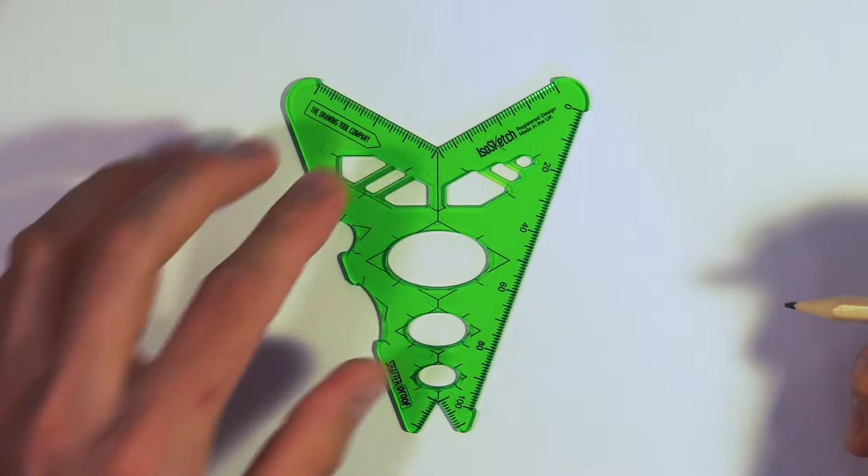Hello there designers! Today we're going to learn how to draw the chassis for our Jaguar Primary School Challenge race car. We're going to start off using the measurements on the screen and drawing the back part of our chassis using the IsoSketch 3D drawing tool.

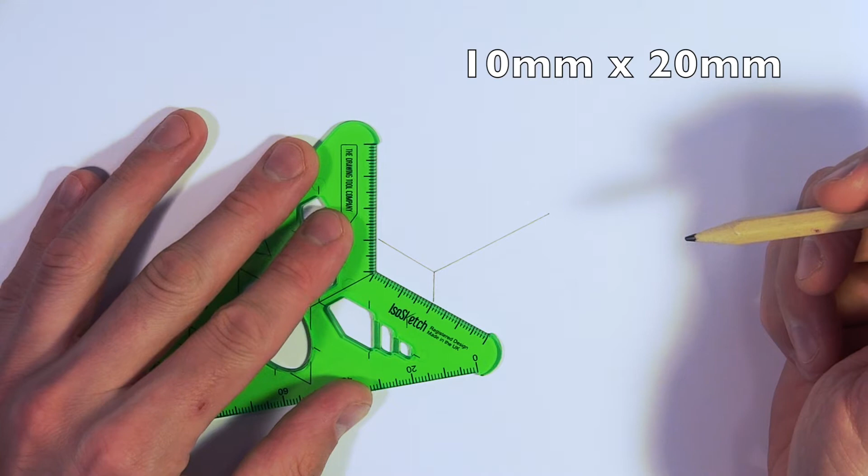You can see here that we're using small measurements: 40mm which is 4cm, 20mm which is 2cm, and 10mm which is 1cm. Here you can see we're just starting to draw a 3D shape with the drawing tool using those measurements on the screen. This part of the chassis looks a little bit like an eraser, so think about what you rub out pencil with if you make a mistake. Hopefully we're not going to make a mistake though today, are we?

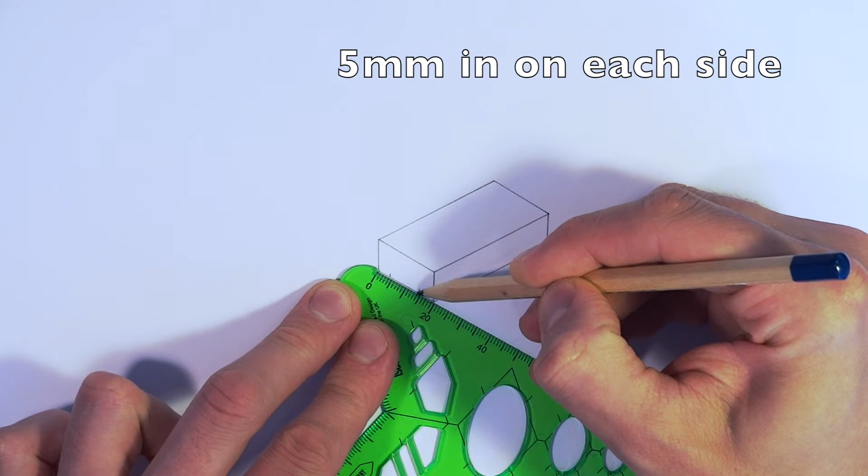So we're just going to join this line up, and you can see on the screen it's 10mm down, 40mm across. What we're going to now do is mark 5mm in from each side on this bottom line here, using the ruler edge, marking 5mm in on both these lines, so the top and the bottom of this end of our chassis block at the moment.

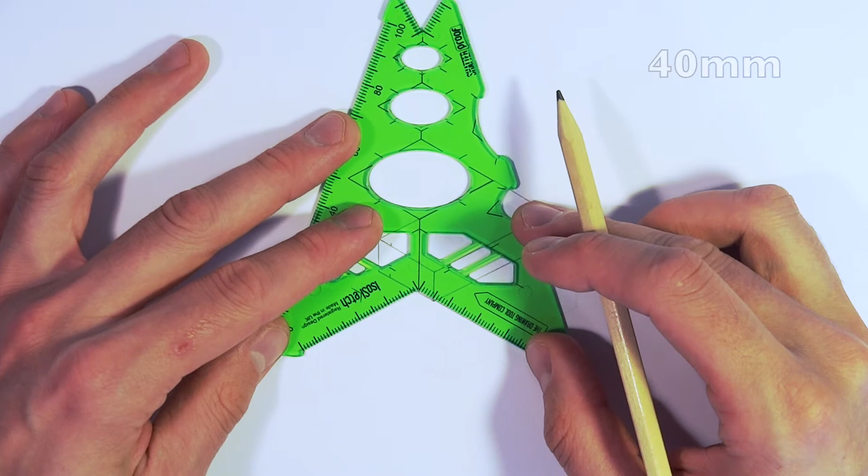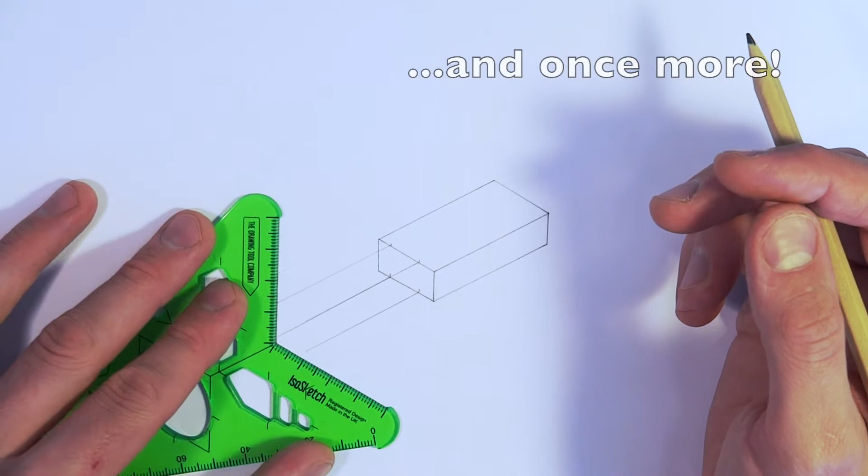Now this is actually the rear of the chassis, so we're now going to draw the front part of the chassis by extending a line 40mm or 4cm straight forward from these points. You see how we're using the IsoSketch tool just to make sure the line is exactly in keeping with the shape, making sure the green edge of our IsoSketch tool sits along the edge on our drawing already. And you can see how those lines look perfectly parallel, and that's the key word here, is that they're parallel with the rest of the drawing.

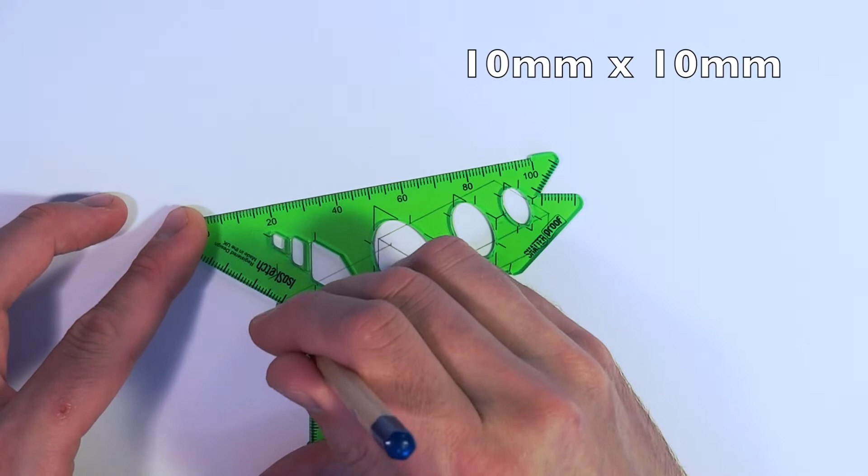So all we're doing now is just finishing this end off, and it's 10mm by 10mm just to finish off the nose cone of our car. How easy was that? Right, we're just going to finish off this little line here so that we've got all the lines that we need in place for the chassis.

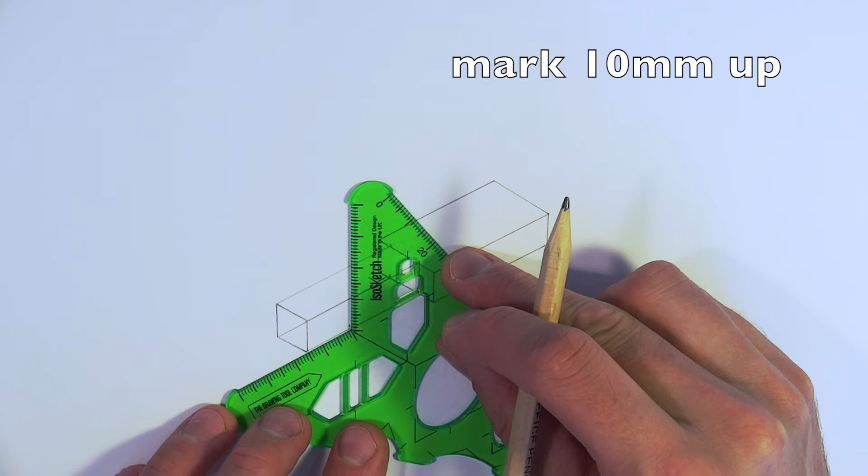And we're going to move on to now marking out where our axles will go. The first thing to do is just line the ruler up so that 0 is right at the start of the shape, and just measure in to where 15mm comes and make a little dot. So 15mm in, and then we're going to use the ruler again, lining up the tool so it's parallel with our drawing, and marking a line 10mm across, and now 10mm up.

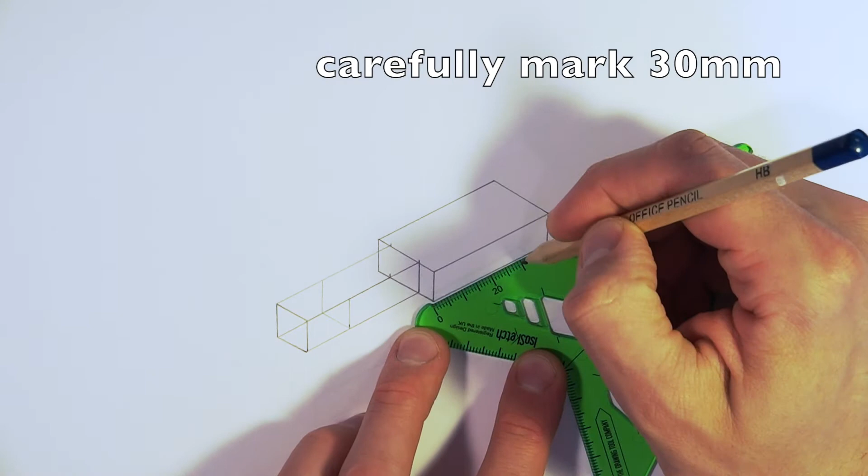So we're marking, think about this being like cutting the shape across, like a slice of cake or a slice of butter, and we're marking across it. Now we're going to do the same at the back, but marking 30mm up from one end, making a mark, and then drawing a line that's 10mm or 1cm up.

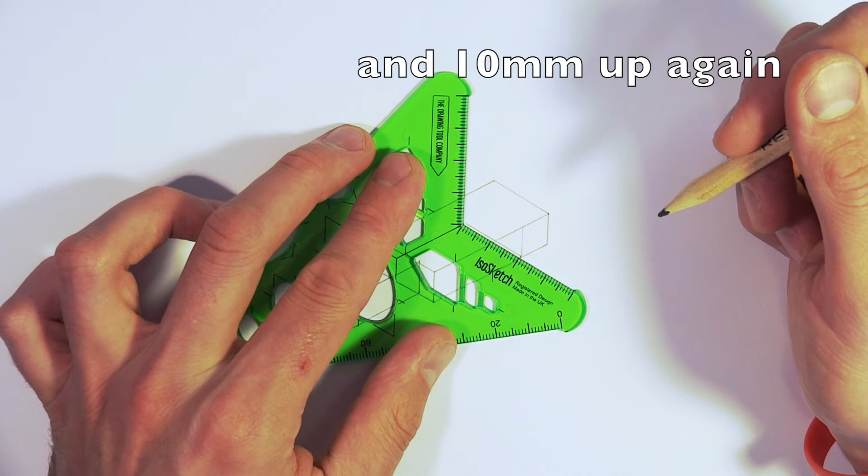Again, move the tool so it's parallel with the shape, and then mark across 20mm. It's important to count these measurements on the ruler as well, don't just guess them. Then finish this off by going 10mm up, and you can see again we've drawn like a slice through our chassis.

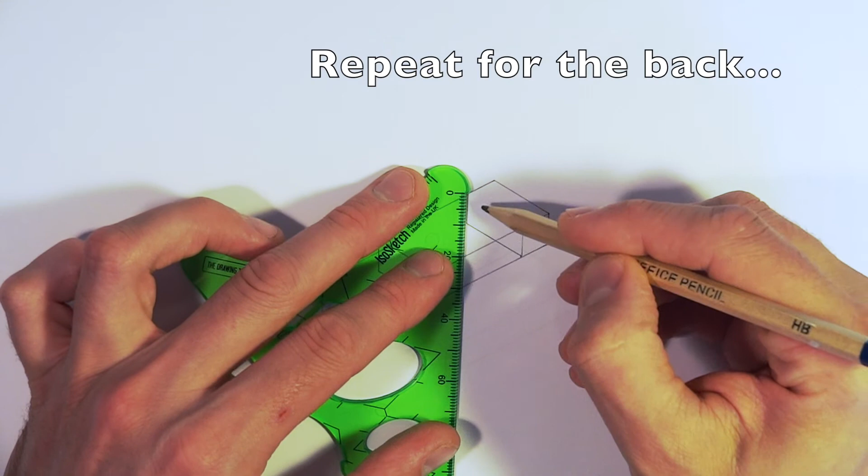Okay, find the middle of this line here, so that's going to be a 5mm dot, and find the middle of the second line. Repeat this at the back, and this is where our axle holes are going to go through our chassis. So we're just finding the middle of all those 4 lines. Now, time to draw our axles on.

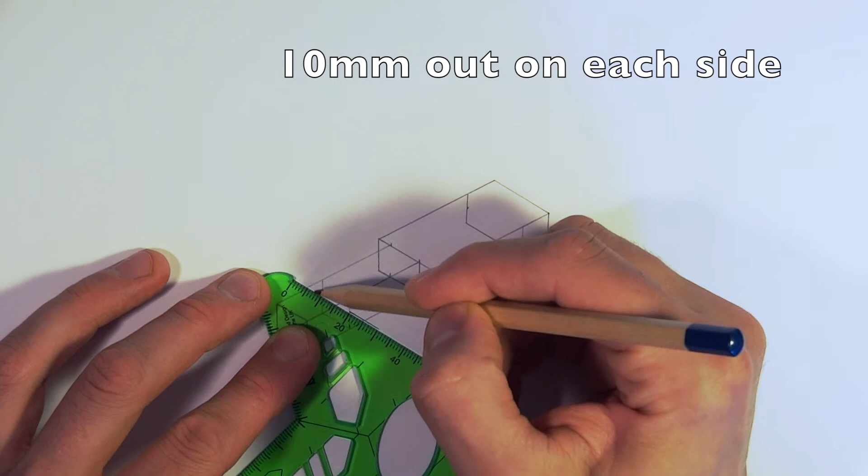Position the ruler so that you've got one of the centimetre or the bigger markings next to your dots, and we're going to mark 10mm out from each side of the chassis. So using the ruler, marking 10mm out, and that will look a little bit like that.

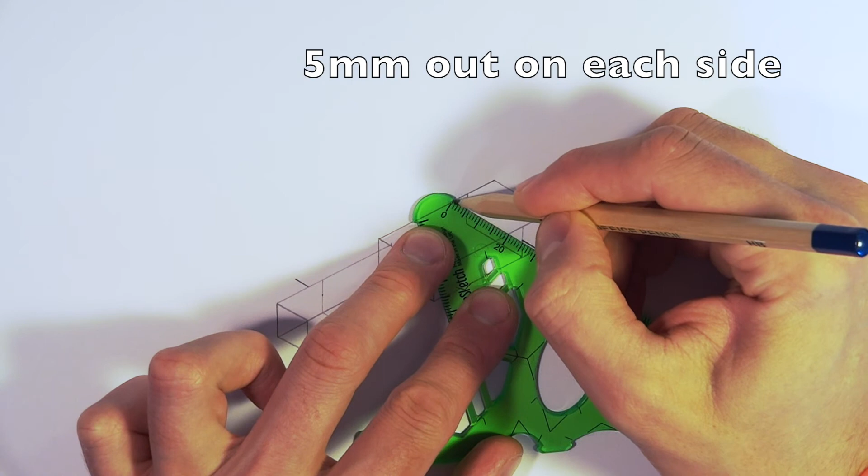Now on the back it's going to be a bit different. Our axles are the same length, but because the body is wider, our axles only need to stick out 5mm on each side. So we're just going to carefully mark on 5mm. See here, it barely even shows over the top of the chassis.

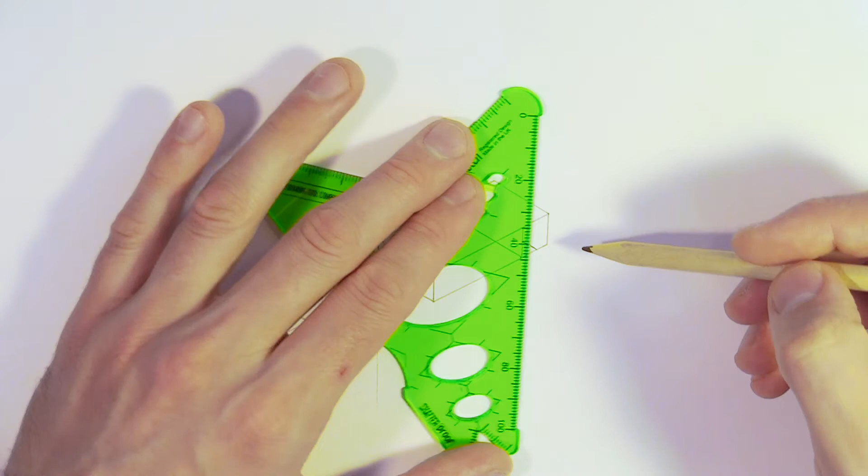Now all that's left to do is mark on where our wheel's going to go. So just gently with the pencil, I'm going to mark on a vertical line. Vertical means it goes from top to bottom on the page. I'm going to go a vertical line, just being careful to make sure that that line is straight up and down. Now I'm going to mark across in line with the drawing.

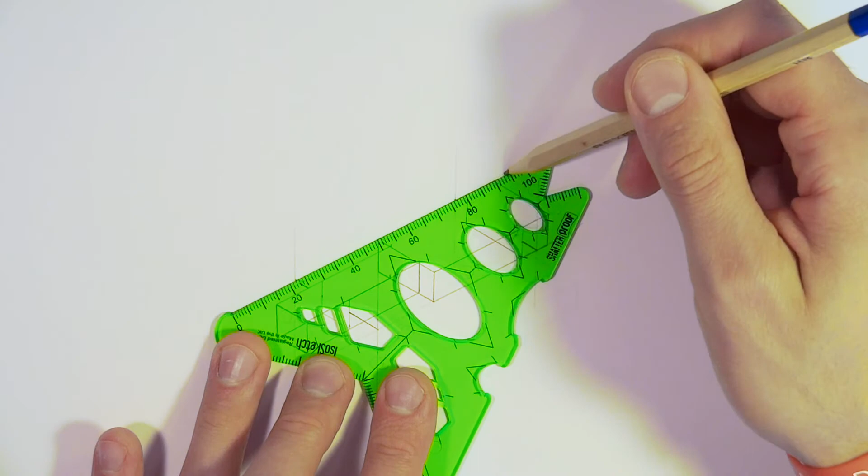So again, parallel with the rest of the drawing, marking a line across where we've just drawn. So if you think about it now, we've basically drawn a vertical and a horizontal line against each of our axles.

Now, we're going to line up our wheel tool here, and this is a circle on the IsoSketch tool, so that the crosshairs match those lines we've just drawn, our soft lines. It's a very simple process, so you can see again, we've got little crosshairs around the circle tool. We're using the middle tool, the middle of the circle tools on the IsoSketch here, just to mark across, and then finish our wheel off.

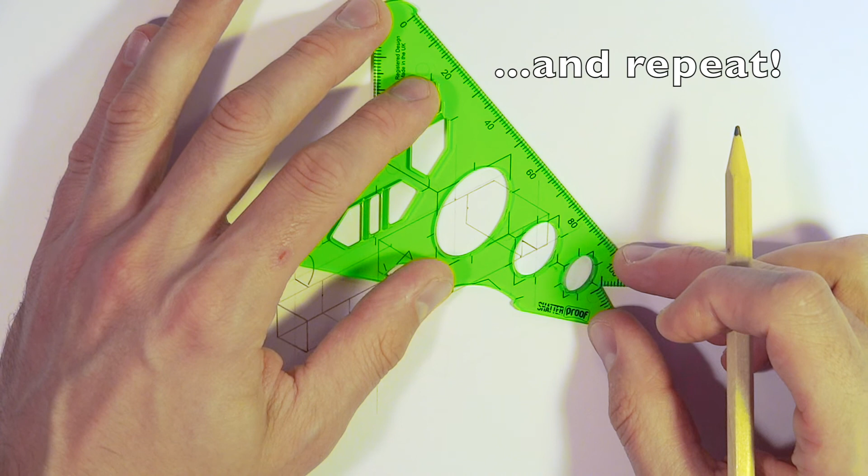Same at the back. And just make sure that you only draw the bit of the wheel you can see, not the bit that's hiding behind the chassis. And there we have it. Next step, we're going to turn it into a racer.